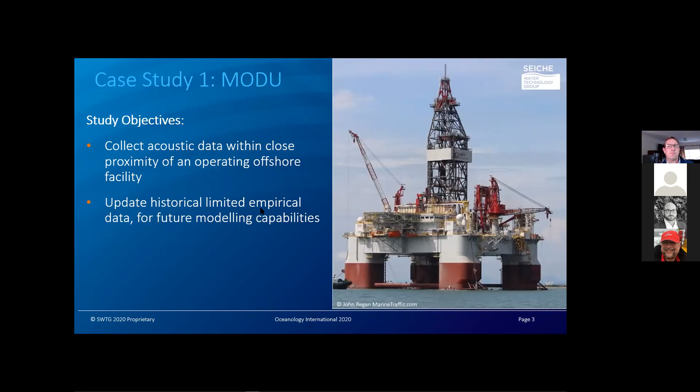To perform this task, a combination of drift buoys and uncrewed surface technology was employed to acquire passive acoustic data, to characterize the underwater sound field within close proximity of the offshore drilling unit, to enable a comparison between measured and modeled data.

There are a number of challenges and safety considerations associated with the project. First, associated with the data acquisition, spatial coverage, whereby there was a requirement to maximize spatial coverage whilst minimizing contamination from other sound sources, so that we were able to acquire sound at distance as well as in close proximity to the drilling unit. In addition, the coordination of the deployment and recovery of multiple independent data acquisition platforms over an extensive area would be quite a challenge to manage in an active offshore oil field producing area.

Secondly, SIMOPS, simultaneous operations, comprising both vessels associated with the oil field activity, namely standby and support vessels operating in and around the platform, coupled with geophysical survey vessels operating adjacent to the study area, plus other maritime traffic operating in the area, cargo and fishing vessels and the like. All of which would need to be considered and planned for with respect to vessel movements in relation to the autonomous data acquisition platforms and their respective sound emissions, which would potentially contaminate the acquired acoustic data of the drilling unit itself.

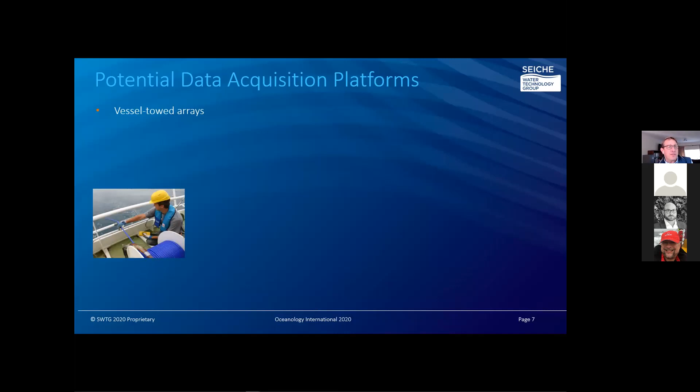To undertake this study, we evaluated a number of different platforms to determine which would be most suitable to acquire the passive acoustic dataset. Historically, as a company, we've used a variety of platforms to conduct studies

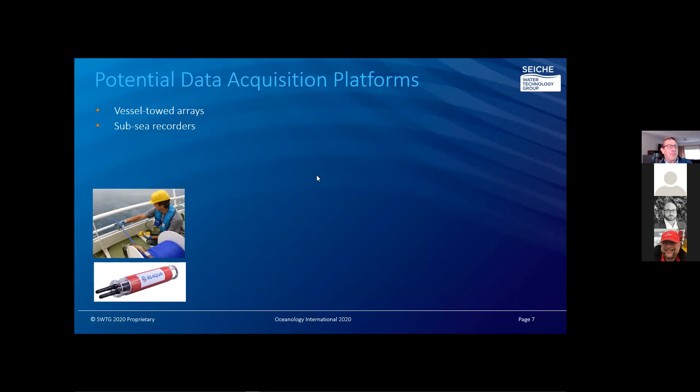involving the acquisition of sound, including towed hydrophones from vessels, deployment of autonomous recorders, and use of drift and moored buoys.

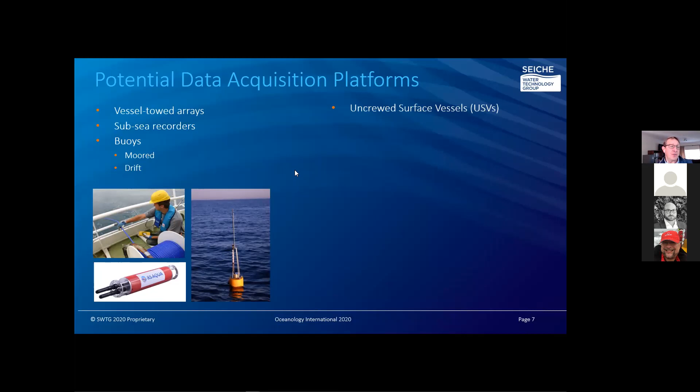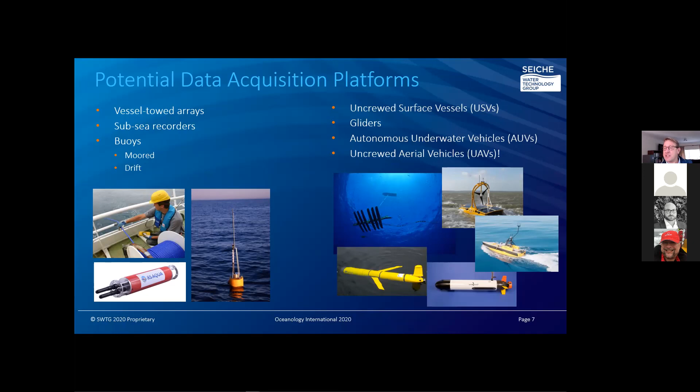For this project, we also considered the use of autonomous platforms that could acquire data autonomously, including uncrewed surface vessels, underwater gliders, autonomous underwater vehicles, and also potentially aerial vehicles, all of which have advantages and disadvantages when acquiring passive acoustic data.

After the review, we determined that we would use a combination of both drift buoys and an uncrewed surface vessel to be able to provide the required data coverage at range and at depth from the drilling unit, and to take into consideration the SIMOPS activities.

The Seiche drift buoys used are designed to record audio data and navigation data as they drift due to the effect of swell and currents.

They consist of a mast housing strobe and radar reflector, a metal top housing containing the battery and GPS tracking units, an E-tube which contains the data acquisition electronics, and a wet leg for additional ballast and stability, plus a hydrophone cable with hydrophones placed at 30 meters and 60 meters.

The drift buoys are passive, non-intelligent data acquisition platforms.

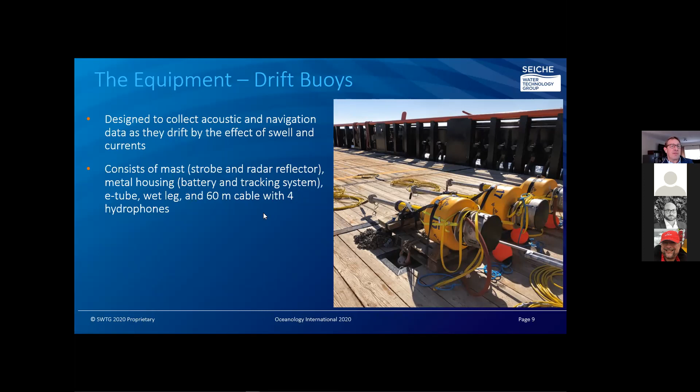During the project, we had a daily feed of information from the EddyWatch program available in the Gulf of Mexico, which provided intelligence to support the deployment and recovery plan, optimize the transect pattern, and ensure avoidance of the 500-meter exclusion zone. Whilst the buoys would acquire data at depth, 30 meters and 60 meters, we'd not be able to use them within close proximity to the drilling unit.

Hence the reason we also utilized an autonomous surface vehicle.

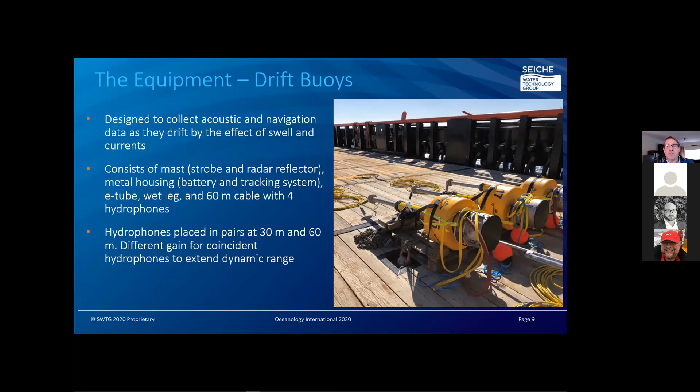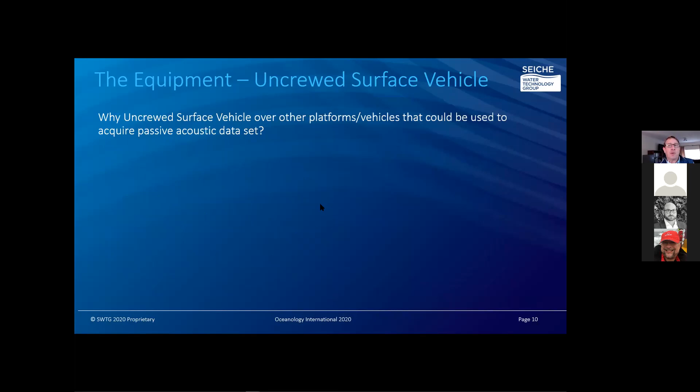The review process to determine why use a surface vehicle as opposed to alternative platforms was based on the following principles: navigation, command and control of two different modes, able to set and monitor waypoints, track a line to follow outside the exclusion zone and update on demand, and also navigation over Wi-Fi when operating within the exclusion zone itself.

Cost - a significant cost saving in deploying a USV compared to a crewed survey vessel, typically a rough order of magnitude difference in cost. And a well-known factor now of using marine autonomy: reduced HSE exposure by removing the requirement to have personnel at sea.

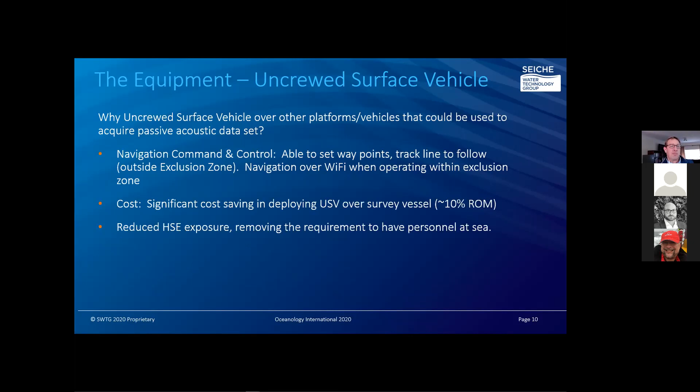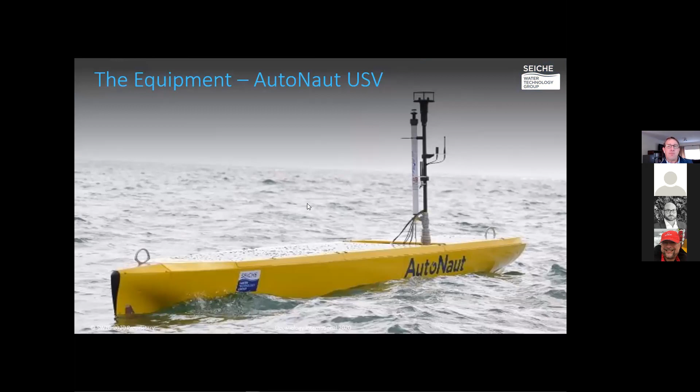So for this project, we chose to use the Autonaut, an autonomous uncrewed surface vessel. Specific prime specifications of the Autonaut being utilized: a 5-meter variant, which meant that we could air freight the vessel easily from the UK to the Gulf of Mexico with sufficient hull payload space.

The ability to be remotely controlled over the horizon, and an autopilot system capable of autonomous waypoint navigation.

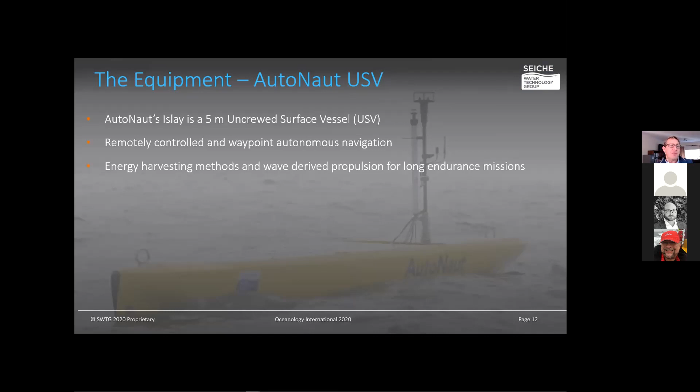Energy harvesting methods capable of both solar energy to recharge the battery bank and wave motion to create forward propulsion, allowing for long endurance missions. And equipped with a communication system and a hull-mounted passive acoustic monitoring system, including a 25-meter towed hydrophone array.

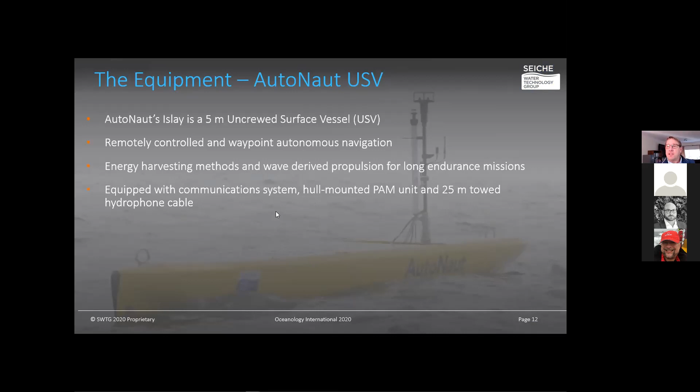With the Autonaut itself, specific advantages being a quiet platform, utilizing wave propulsion technology as opposed to an engine, which eliminates potential for contamination of the sound dataset by self noise. Zero fuel, therefore a cost saving and minimizing the carbon footprint of the platform.

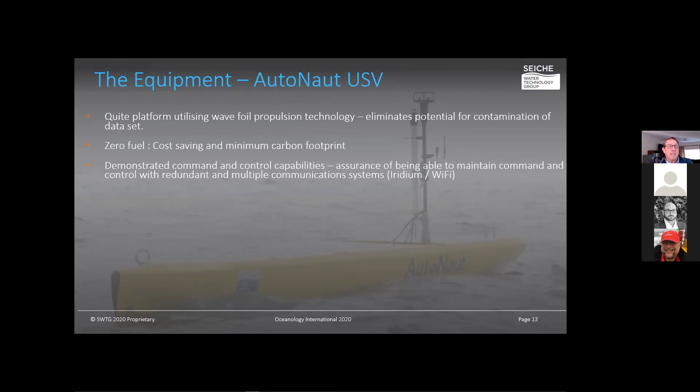With demonstrated command and control capabilities, which provided the assurance of being able to maintain positional control with redundant and multiple communication systems, including satellite and Wi-Fi comms.

Ease of integration of the Seiche MicroPAM system, which was a case of just adding power and a GPS feed, with payload space suitable to accommodate the head electronic unit.

Clean continuous power, with the only consideration being the potential for contamination of the acoustic data should the auxiliary electric thruster be utilized at any point, and multiple attachment options for the hydrophone tow point.

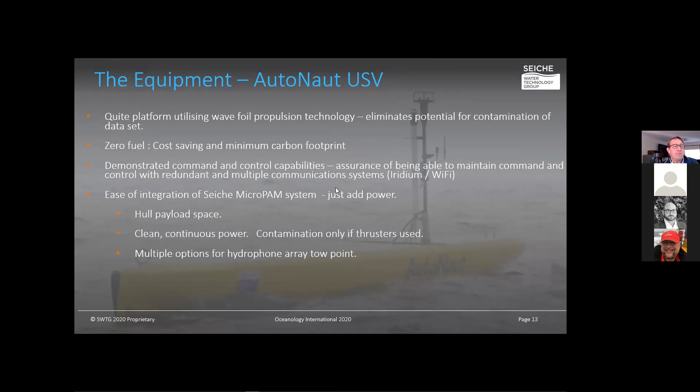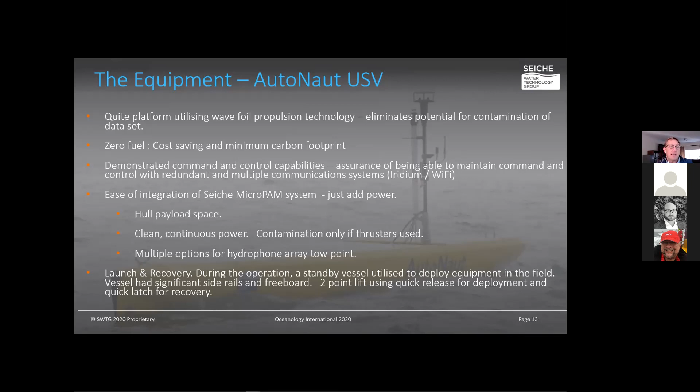Plus relative ease of launch and recovery of the Autonaut itself. During operation, a standby vessel was utilized to deploy the equipment in the field. The vessel had significant side rails and freeboard, thus a 2-point lift using the vessel's crane, plus quick release for deployment and quick latch for recovery.

A key requirement for this project was to gain permission to operate within the 500-meter exclusion zone. This would be achieved once we had been able to demonstrate assurance of the remote control through waypoint navigation, whereby we could demonstrate heading maintained within 5 meters of the track line.

In addition to this, a detailed emergency response plan was developed and agreed with the client during the planning stage, including the requirement to have a standby vessel available at all times, so that in the event of a failure of Autonaut, whether as a result of communications, power, or mechanical failure, an emergency recovery could take place.

We took advantage of those currents to get a good spatial coverage of the far fields out to 5 kilometers from the drilling platform. Drift buoys were deployed outside the safety zone and during daylight hours only.

The Autonaut completed transects to the east of the drilling unit to demonstrate full command and control, subsequent to which permission was granted by the client and OIM to enter the 500-meter exclusion zone.

Conditions of operating within that zone included only operating during daylight hours, operating under local control via Wi-Fi from the support vessel, and having access to the DP2 capable vessel to be able to effect emergency recovery from the exclusion zone should the need arise.

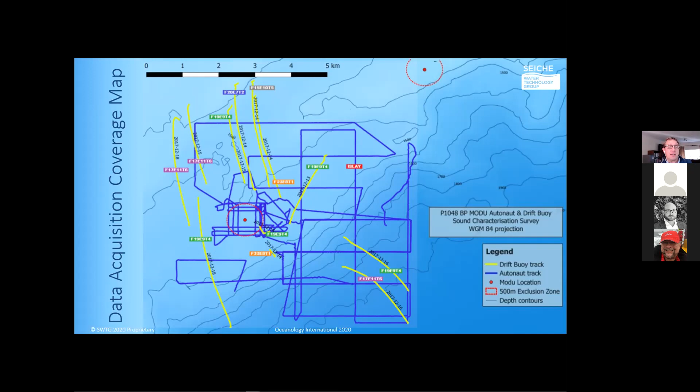Simultaneous operations planning and operation protocols enabled integration of our data acquisition efforts with daily activities of the drilling unit and attendant survey vessels. This involved reviewing the daily operational window of opportunity between other activities and daily area fleet calls coordinated by the client, including sharing a 24-hour look ahead for all vessels and planned activities.

Key to the project was the ability to acquire acoustic data within close proximity to the drilling unit. The photo shows the Autonaut in the foreground with the drilling unit behind, showing a 140-meter close pass. Noting that the measurement is made from the navigation reference point on the rig, which is generally at the center, so actual closest point of approach was more likely sub 100 meters.

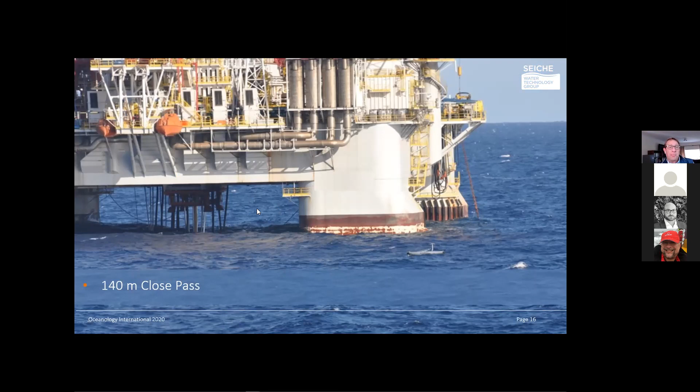Whilst it's recognized the impact of collision between an Autonaut constructed of carbon fiber against a steel structure of the drilling unit would be negligible, the requirement to provide assurance that command and control will be maintained at all times whilst operating in very close proximity to the drilling unit remained paramount.

The net result being the acquisition of a multi-azimuth rich dataset by Autonaut in close proximity to the drilling unit, combined with the drift buoy data at range and at depth.

The results of the project were presented jointly by BP and Seiche at the 2019 Effects of Noise on Aquatic Life conference and a subsequent technical paper published in the Journal of the Acoustical Society of America in November this year. Links to the papers are provided for further reading.

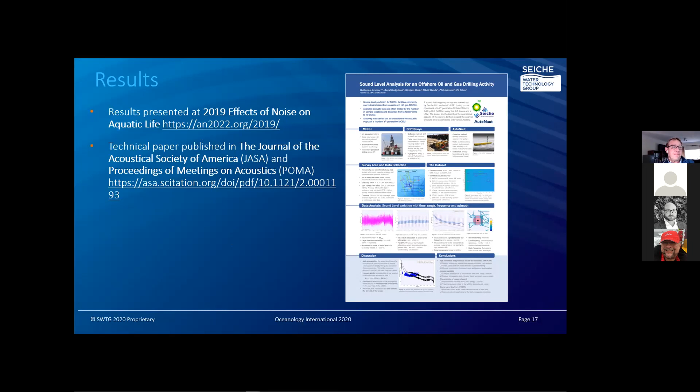A second case study involves the ocean cleanup project, whereby the team are aiming to remove plastic litter from the ocean, initially targeting the Great Pacific Garbage Patch using a surface barrier to accumulate plastic, which is subsequently removed, analysed, processed and recycled into high-value, non-single-use products.

Autonauts completed a series of missions for the ocean cleanup, up to 50 days per mission, performing a number of functions to support the offshore operations. This included asset integrity monitoring.

Additional sensors included a hull-mounted ADCP, acoustic Doppler current profiler, to provide current information, plus metocean sensors for wind, wave, and temperature measurement. A key functional requirement was the ability to operate within close proximity to the barrier system, normally at a range of 5 meters.

To be able to conduct autonomous operations whilst the barrier was free floating in the Pacific Ocean, a navigation module was developed such that the Autonaut would follow the AIS transponders located on the barrier, with autonomous autopilot modes for fail-safe operations. In effect, the AIS position of the transponder, coupled with a defined standoff range, created a series of waypoints for Autonaut to follow, which was updated at periodic intervals.

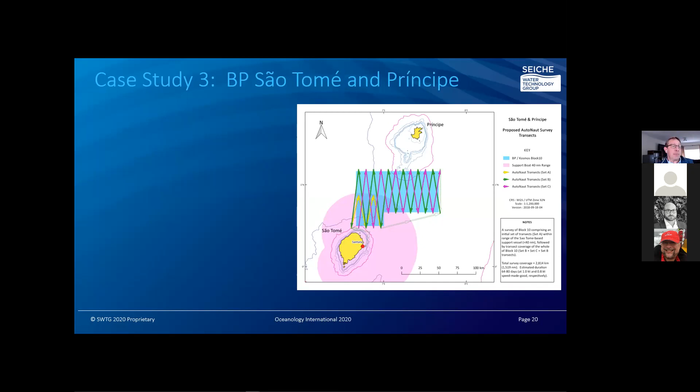Third and final case study was a mission completed on behalf of BP between the islands of Sao Tome and Principe off the west coast of Africa. The project comprised a marine mammal baseline study utilizing passive acoustic data in a remote and extensive area to understand the presence or absence, distribution and abundance of marine mammals over an extended period of time.

To undertake this project, we operated an Autonaut from the island of Sao Tome, whereby the vessel was launched from a remote beach and sailed autonomously to the study area, whereupon the vessel conducted a series of multi-week missions in rather challenging conditions.

During the project, we encountered strong and unpredictable surface currents, flat, calm seas, significant cloud cover, rapid bio-fouling, and unintentional interaction with local maritime users.

The strong and unpredictable surface currents would prevent Autonaut from maintaining transit line position under wave propulsion alone, and we had the occasional use to use the auxiliary electric thruster to offset the currents, which would in effect contaminate the acoustic data set.

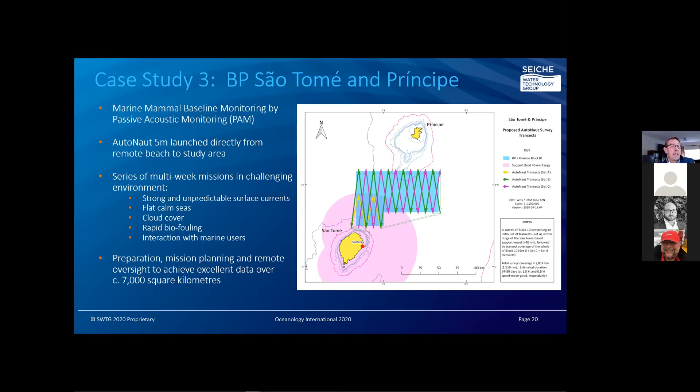Further hampered by flat calm seas, resulting in reduced propulsion of the Autonaut, which relies on the pitch and roll movement of the Autonaut to induce forward propulsion.

The significant amount of cloud cover impacted the amount of solar energy which would be harvested, which created a significant challenge to manage the basic power load required by the command and control, the autopilot, versus the sensor systems and the thruster, if so required.

The rapid biofouling we encountered, despite the anti-fouling copper coat, still readily built up in unprotected areas, which impacted both propulsion and steerage efficacy. In addition, despite a significant local stakeholder engagement program, there was interaction with other marine users which came across Autonaut whilst deployed at sea, which proved a particular challenge.

A further challenge and operational consideration was the value of the data set being recorded on board, with the only information being transmitted via the Iridium SATCOMs being a QC function to confirm data was being acquired and file size increasing. Consequently, mission lengths were curtailed to effect a return to port of the Autonaut and recovery of data sets.

In spite of the challenges that beset the project, with meticulous planning we were able to acquire data over some 7,000 kilometers squared, which has also resulted in a very rich quality data set of the soundscape and characterization of the marine mammals encountered during the time period.

Data has just finished being processed for this project, and data sets and outcomes will be published in due course.

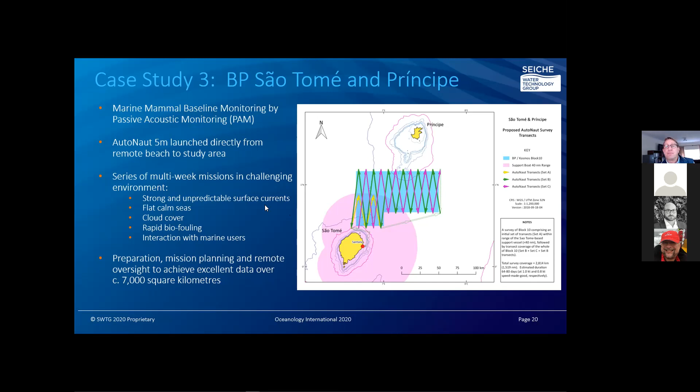As a final slide on this project, the photo illustrates the conditions of the remote beach deployment for the project and a sample snapshot of the acoustic data acquired, which features extensive delphinid vocalizations. As with other autonomous operations, the use of uncrewed surface vessel enabled data acquisition in a remote area with minimal infrastructure and local expertise.

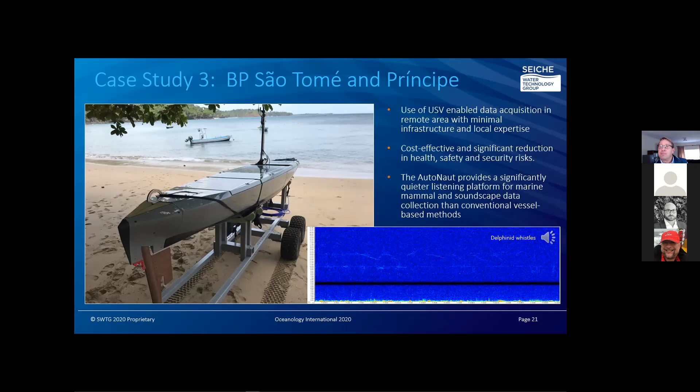By way of a wrap up and summary, I've covered 3 different case studies which demonstrate the ability to acquire quality data sets using marine autonomous systems whilst achieving reductions in cost, in reductions in health and safety and security risk, and impacts on the environment's carbon footprint.

In addition, we have demonstrated the ability to operate wave-propelled, uncrewed vessels in a number of different and challenging operation areas and scenarios, including close pass maneuvers with fixed structures, such as the drilling unit, and with dynamic structures, such as the ocean cleanup barrier.

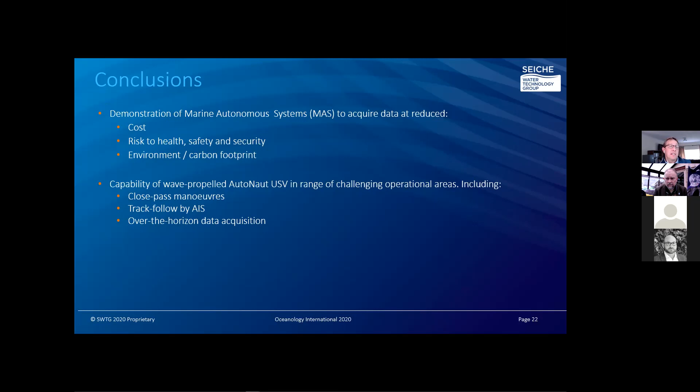Further demonstrated the necessity to develop novel software to enable those applications, including the AIS track and follow navigation system, plus demonstrating over-the-horizon command and control capability and assurance by remote pilots located anywhere in the world.

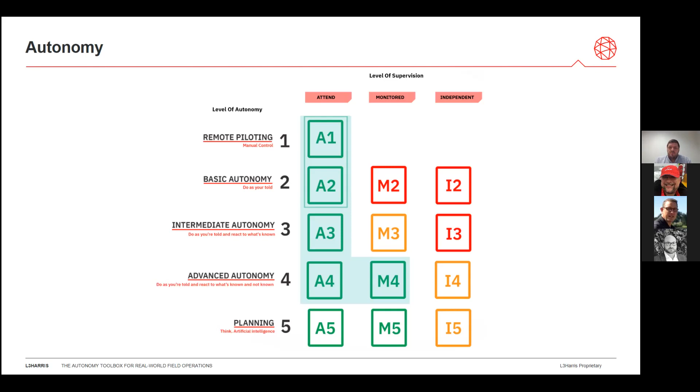So what does this autonomy look like from a point of view of control of these vessels?

You start off with data. At sea, data is not a static thing. You do have some static things such as charts, waypoint plans, and geofences, which are all fed into the system in the back end. But the dynamic nature of the sea means data is always changing. You've got radar coming in, camera data, AIS, all filling into this world model. An important part of how we deal with this world model is that we're also looking at future world models, so we take that radar and AIS data and project it into the future. I'll talk more about how we're developing that functionality later on.

What this means is we can give the vessel's autonomy some of the attributes that people put on data when they're at sea. When you're a skipper helming a vessel and you look out to sea and see a container ship coming across your path, you don't just look at it in the position it's in - you use your intuition to project that forward in time. What we're trying to do is imbue that onto the vessels we're designing and building at the moment.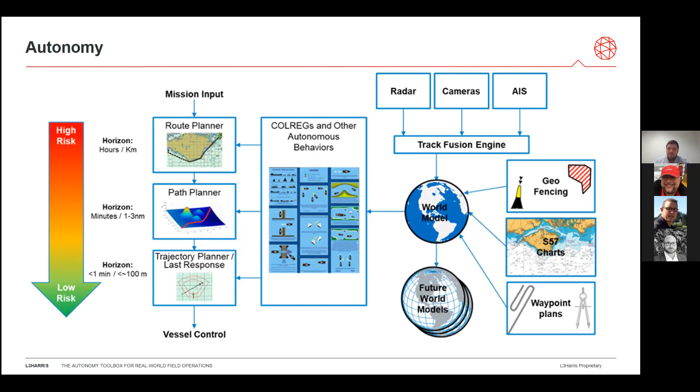So some other areas of development for us is split across three core areas. Vessel control: how do we guide these vessels once we've got the data? Following paths, so other platforms, things like that. And how do we control our actuators in the best way?

Intelligence is the core of what we're developing at the moment, which is really around how we take data in and how we make decisions on that data. So some of the things I've talked about already, such as bringing in data from AIS and radar, and how we do collision avoidance. But this has got to be built on good data, which is all about perception.

So what cameras are we using and how are we using them? What chart data are we using? And can we get data from external sources, either that be tracks from another radar system, AIS from satellite systems? How do we get that data back? And then how do we present all of this data to the human?

So this is all areas that we're developing, and we've got working prototypes in every area here that's showing an increased ability for the operator to have situational awareness and execute a mission in an efficient way.

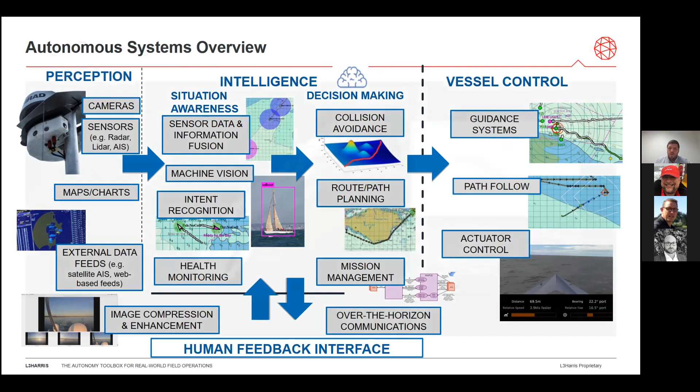One of the things we've been working on recently has been target following using cameras only. This is going to come into its own when we're starting to talk about autonomous docking and things like that.

You can see the vessel here is following an icon on the back of a vessel. Now we've used the icon specifically because that allows the camera to track that vessel and also to enable it to know how far away it is.

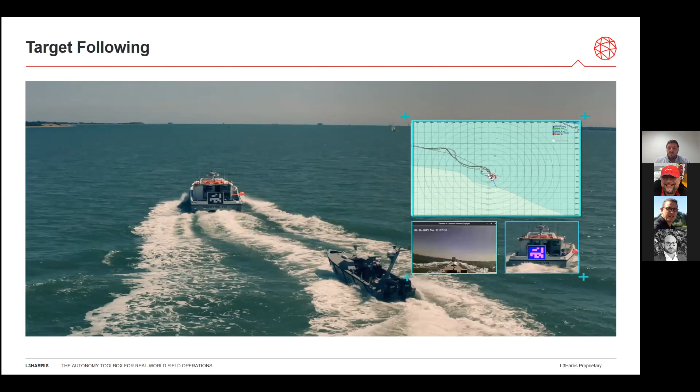Whereas if you didn't have that icon, you wouldn't be able to know how far away it is, just the angle. And we've been developing the precision of this to enable us to dock a vessel of that type into a cradle.

And then talking about how we move forward in a confident way and understanding further and further ahead what other vessels are doing, we've been working on channel classifiers.

And looking specifically at places like the Solent, what we can do is say, well, this vessel is a large container ship, therefore we can predict where that vessel is going to go. So, for example, if it was coming in through the forts near Portsmouth and it was a large container ship, we can predict with very high accuracy where that vessel is going to go.

We know it's going to follow the channel to Bramblebank, and we know it's going to turn to starboard and go up Southampton Water. And what that does is it enables the autonomy to make decisions earlier and earlier.

So those are some of the things we're working on. And you can see now in the video coming up some of the trials that we've been doing.

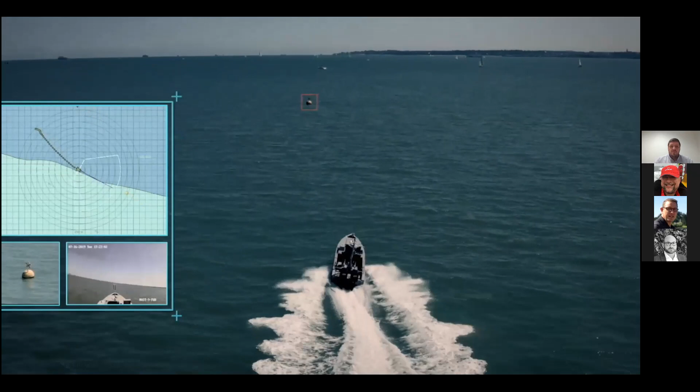This is the MAST 9 platform we work on with DSTL. And what we've done here is turned off the advanced autonomy, and we're solely using a small radar to do collision avoidance on structures in front of us.

And as you can see, the buoy in front of us was detected very early, and we can make a really clear, safe turn to starboard.

And some further views of the follow behavior, what we're looking at with regards to some of our camera vision, which if you're interested more in our vision systems, I really encourage you to listen to a talk from one of our data scientists, Hannah Thomas.

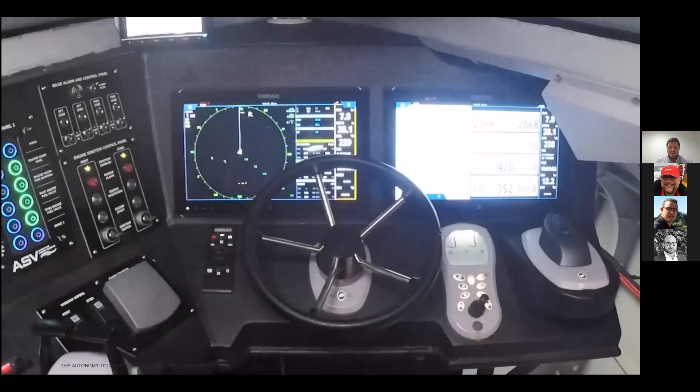It always impresses me when I hear a talk, even if it does blow my mind a little bit. Here we can see what the result of some of our autonomy is.

So this is the MAST 13 platform owned by DSTL and operated by L3 Harris. We performed an operation where we approached within 12 miles of the coastline of France using our advanced autonomy systems, completely unmanned. The vessel was operating at 40 knots for over 3 hours, using the WESCAM system on board to ensure situational awareness and detect other hazards in the area. This enabled us to really demonstrate the robustness of the collision avoidance autonomy we've developed, and it was a great showcase.

But all these different bits of functionality are lovely in themselves. What we need to do going forward is enable the autonomy system, as it's so developed now, to make some of these decisions itself, take individual behaviors, or what we call primitives, and build a set of behaviors out of that. Then link a number of sets of behaviors together to create a plan, and enable the vessel, based on its sensor input, to choose which of these plans it's going to execute.

So what we're looking at is taking primitives - things like follow this from this distance, do an orbit here, follow this line - but then add a level of conditions to those. The different conditions might be weather-based or distance-based. In a military example, it could be something like: I want you to protect this frigate, however if another threat comes within 500 meters, I want you to go and investigate it. So we're enhancing the level of autonomy the platform brings, and therefore reducing the load on the operators.

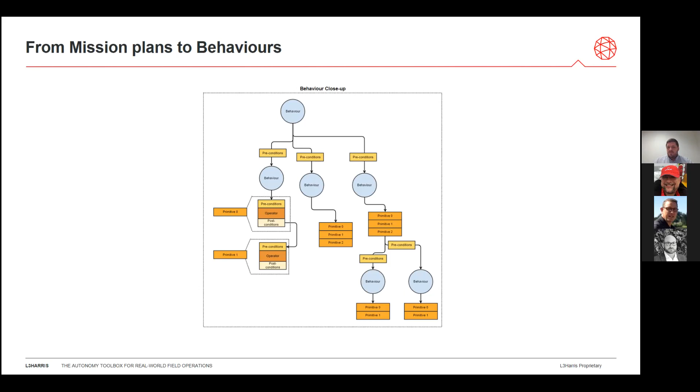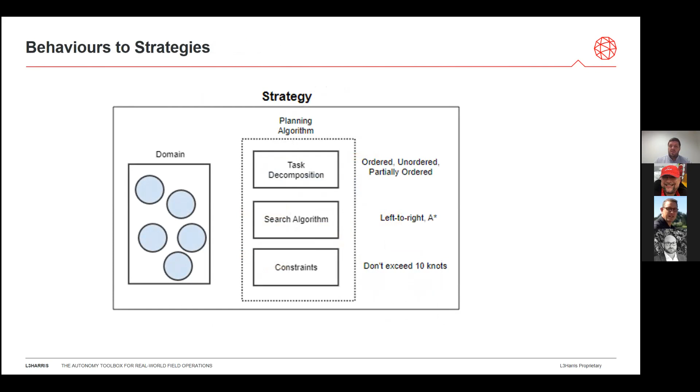So now we've got this, that's great. But actually what we want to be able to do is take this another step further. We want to take these groups of behaviors and develop strategies so that we can give the vessel more possibilities for how it can decide what task to do. Ultimately what we want to be doing is letting the vessel choose which strategy it's going to take forward, and that's going to take the view of task decomposition.

So rather than having to define the strategy for the platform, an operator will be able to say, I want you to go and do X. Other things we're working on in the background to support this are things like a heterogeneous comms network. So when you've got multiple platforms, maybe with different capabilities, the system will be able to detect those capabilities and then assign a strategy based on either vessel capabilities or the goal that's trying to be achieved.

So that ultimately we can have the greatest level of flexibility and really enhance the value an operator brings to this scenario. If it's a simple mission where the vessel can control itself through parameters it knows on board, let it do that, and let it flag to the operator when either it can't complete the mission or there's an issue on board. If there is an issue on board, you don't want 500 different notifications of different things - what you want is one notification of what the core problem is. So how do we respect that operator's attention?

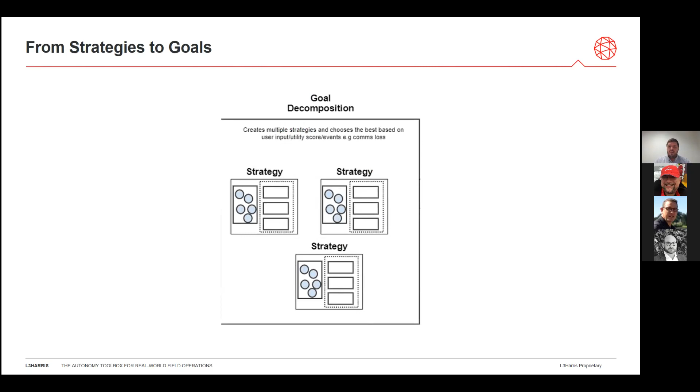So thank you very much for listening to me. I hope that was interesting and can demonstrate where we're going with autonomy and some of the missions we've been achieving recently. Thank you.

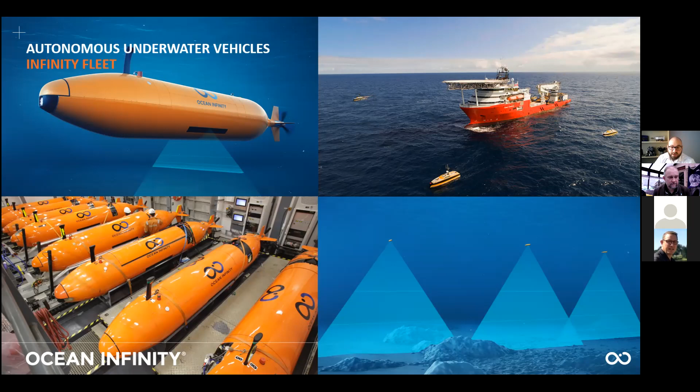Regarding our vehicles themselves, the AUVs are equipped with the world's most advanced hydrographic and geophysical sensors. Through partnerships with various key battery and operations technology providers, all of our vehicles have single dive mission lengths far in excess of industry standards, allowing us to push that operational envelope even further. Since 2016, we've logged even more commercial AUV hours than anyone else, allowing us to really know even more about our equipment than most, and it allows us to get even more out of our technology, which really adds to our model itself.

But why approach the use of AUVs differently, as opposed to following a fairly standard single vehicle model that has served a range of industries very well over the years? Ocean Infinity believes that leveraging technology and pushing the boundaries of what is capable has direct benefits, and we believe we've proven this over the last few years.

Some of the advantages of a multi-AUV model: depending on the resolution of data sets required, of course, but our multi-AUV model with 8 vehicles in the water simultaneously can generate up to 1,100 kilometers squared of seabed survey data in a 24-hour period. Anybody who knows their AUV survey knows that that's a vast quantity of data, which really allows the rapid completion of offshore projects. It also allows the optimization of offshore personnel levels.

The staggered launch and recovery of the vehicles means that we don't need 8 individual AUV crews on board. We need fewer technicians, fewer operators, fewer mechanics and engineers, and this really allows us to reduce offshore headcount as much as possible. That reduces offshore exposure hours, but it also reduces the need for multiple vessels, so we can do all this off a single ship. It also gives us a bit of natural redundancy.

We can carry more than the number of AUVs required on a project, therefore we get natural redundancy of a whole vehicle and sensor package in itself. It also means there are more capabilities to install additional vehicles onto a project. We have advantages in remote locations, far from ports, in parts of the world that are difficult to ship equipment and replacement vehicles to. So the risk to clients using a multi-AUV model is far reduced by the ability to have that redundant system on board.

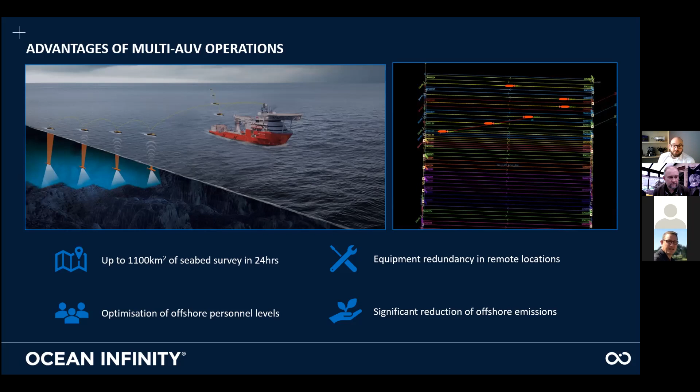This really allows us to minimize not only the exposure hours that I touched on earlier, but the overall emissions on a project. So I wanted to spend some time running through a couple of case studies just to showcase the different elements of the operational model that we've adopted.

As you probably know, Ocean Infinity ran a 2018 campaign to apply this multi-AUV technology to the search for the missing aircraft MH370. No one knows quite where it is, of course, but it is believed to lie in between 4,000 and 6,000 meters water depth along the so-called 7th arc in the southern Indian Ocean.

The seabed conditions in this part of the world are incredibly varied. It's a huge amount of seabed to be looking within, which means you get a huge amount of variation in that topography. It varies from relatively simple flat abyssal plains right through to the complex bathymetric environment of the Broken Ridge seamount.

This really requires the fact that you need AUVs to do this work. There are incredibly complex seamounts, canyons and ridges, and even deep tow systems just cannot achieve the resolutions required to search for something so small in somewhere so large. However, sadly, after 138 days and over 125,000 kilometers of seabed search, the aircraft remains missing. There are constant discussions about re-enlisting that search to carry on.

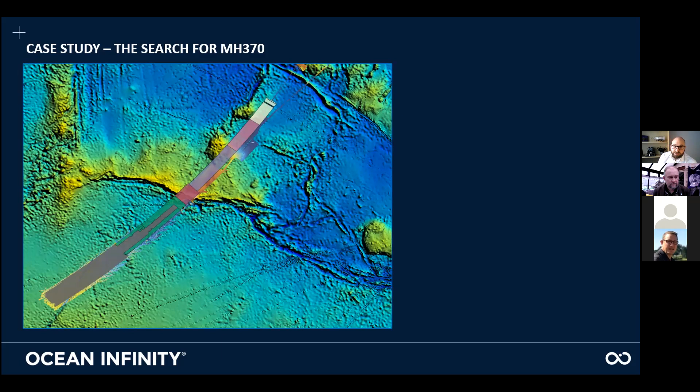To give you a bit of comparison between the multi-AUV model and a single AUV model, I've looked at two different search campaigns. Initially, after the vessel went missing, the Australian Transport Safety Bureau commissioned a search area to be undertaken, which is that red area, as you can see. This was conducted using 4 vessels, totaling 837 vessel days. The total seabed covered was 121,500 square kilometers, which is a huge volume.

But the difficulty there is that actually there was some lower probability of detection areas. So just over 2% of the information, once processed and once the data had been reviewed, was actually viewed as a lower probability of detection.

One of the problems there is that, until you can have some confidence in your data and all of your data, there's every chance that the vessel went over the airliner but was unfortunately unable to locate it. The other thing to bear in mind is because 837 vessel days is a large number, and they're large vessels operating this part of the world, the vessels themselves burnt just over 12,000 tons of fuel and subsequently emitted just shy of 40,000 tons of CO2 over that 837 vessel days.

Now, to compare that to the multi-AUV model that Ocean Infinity employed, as opposed to the single AUV model used on those other ships, you can see that variation there. Ocean Infinity were able to provide a much more efficient and rapid data acquisition capability, with far fewer areas being in those lower probability of detection criteria. There's actually a greater area of seabed searched in just over 15% of the vessel time. So that really shows you the advantages of the multi-AUV model.

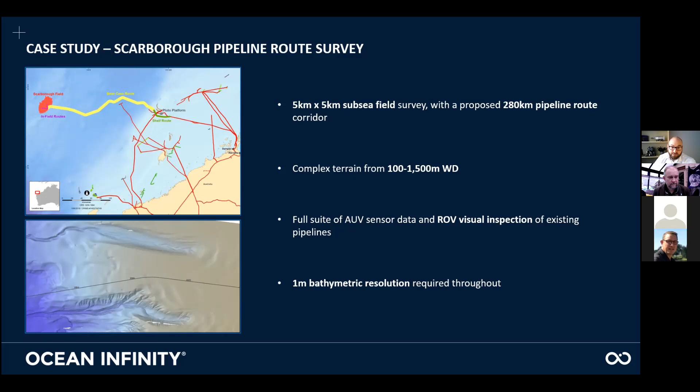So a multi-AUV rapid acquisition solution was proposed by Ocean Infinity to our client, in order to showcase the capabilities of the system. To give you an idea of the size of the project, we collected approximately 7,000 line kilometers of AUV data. We achieved this using the multi-AUV model with 0 weather downtime, because we were able to limit our offshore exposure to about 20 days. The other key point is that because of the way Ocean Infinity acquire and represent their data when the vehicles return back to the vessel, that high resolution bathymetry data particularly was available immediately after vehicle recovery.

A single AUV vessel costs a certain amount, and whereas the Ocean Infinity model does cost more on a daily basis, the huge increase in the amount of data acquired in those 24-hour periods really does make a big difference.

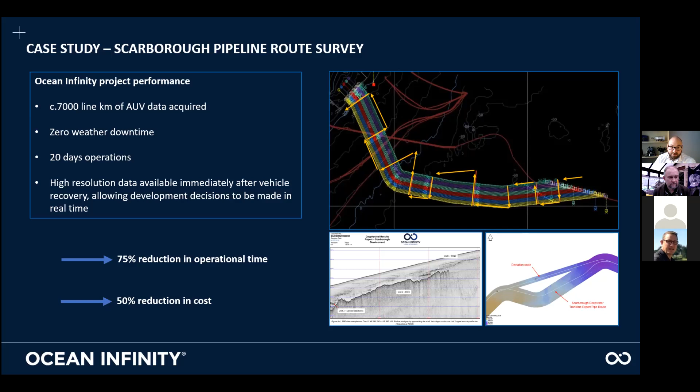So just to summarize some of the case studies I've talked about, the multi-AUV operational model allows a step change in the scale, the precision, and the speed of offshore data acquisition. We enjoy far greater levels of sustainability, and we can achieve this through force multiplication using those robotic and uncrewed systems. But the truth is that none of this model would be possible without the world-leading team of experts that we rely on for these complex operations to be planned, executed, and reported.

And the team at Ocean Infinity are well versed in this model. They're well versed in the use of incredibly complex technology to really leverage those advantages that I talked about. And we're pleased to be able to continue to offer this to our clients around the world.